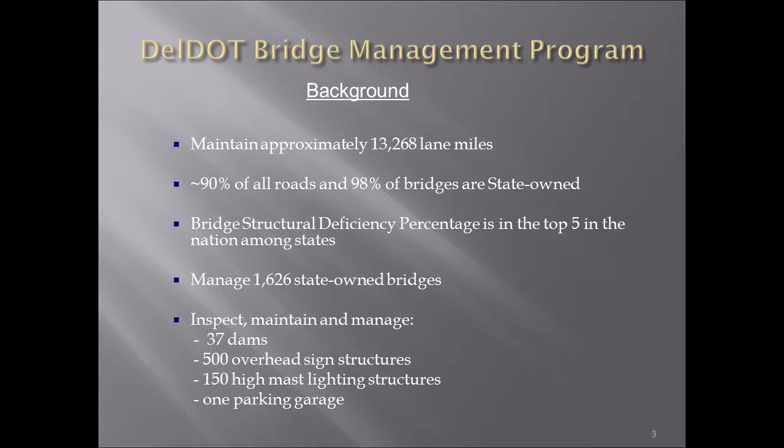As I said, I'm the bridge management engineer, so I oversee the bridge management section. Just a little bit about our core functions. A lot of the functions are no different than the other DOTs here. Obviously inspect the bridges, maintain load ratings, process hauling permits. Big thing is prioritizing bridge needs, maintain the bridge preservation deterioration models. The other thing we do is, we obviously inspect the overhead sign structures, dams. We manage those as well.

We also do the cantilever traffic signals. We inspect those for our traffic section because they don't really have inspection personnel, and they're kind of important structures that we've had problems with. So we actually inspect the cantilever traffic signals as well. We do that through a consultant. We don't do that in-house.

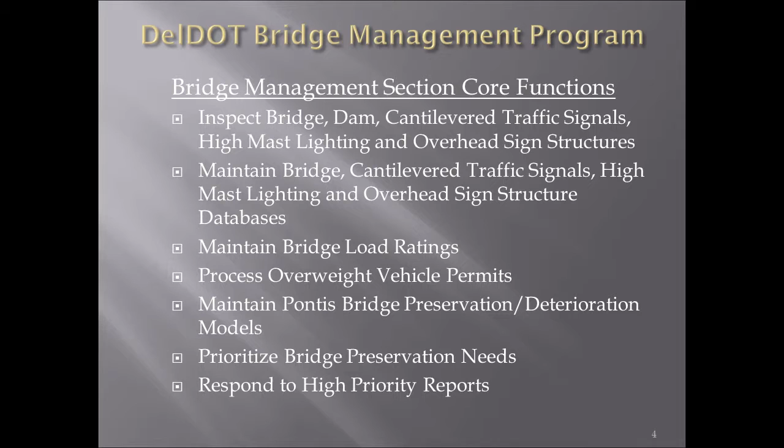And the last thing is we respond to high priority reports. That could be anything from a property owner complaint about drainage. It could be a bridge strike. In fact, last week we had 3 bridge strikes. And of course, one was Friday afternoon about 3 o'clock right before Labor Day weekend. So those are always fun.

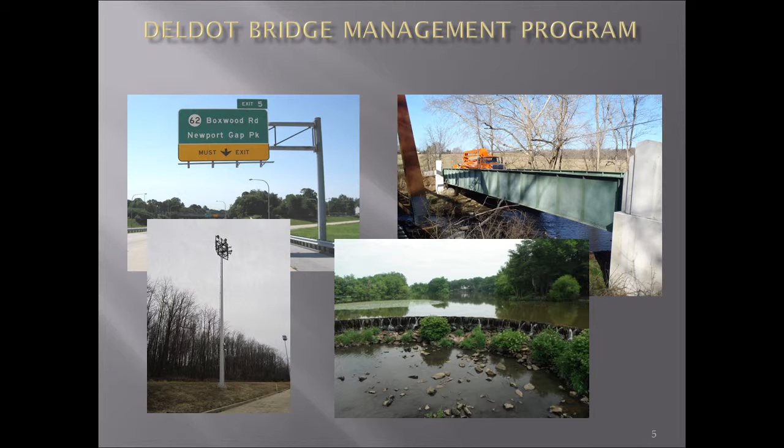Just a quick view of some of the structures here. You see a cantilevered sign structure upper left-hand corner, high mast light. Got a through girder bridge. It's a fracture critical bridge up in the upper right-hand corner. And then a picture of one of our dams. It's actually looking at the spillway taken from the dam.

Kind of jumping into the current state of our bridge inventory. As I said, we had a little over 1,600 bridges. You can see we have a lot of culverts, and so of the 1,600 bridges, about half of that are NBI length structures, about half of that are what we call state length bridges. So the majority of our state length bridges are culverts, so that's why that number is so high.

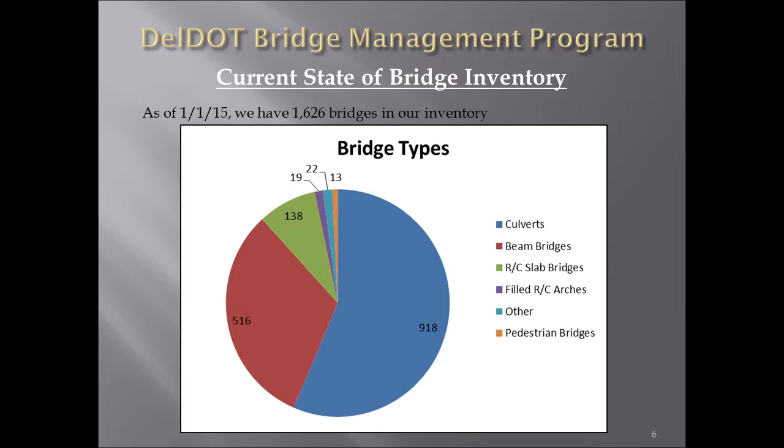See, we have beam bridges. The 22, that little light blue sliver, that's other. We do have 1 cable stay bridge. That's our Indian River Inlet Bridge. It was just completed 3 years ago. Includes our movable bridges, some other complex bridges. I think total we have like 27 fracture critical bridges in the state.

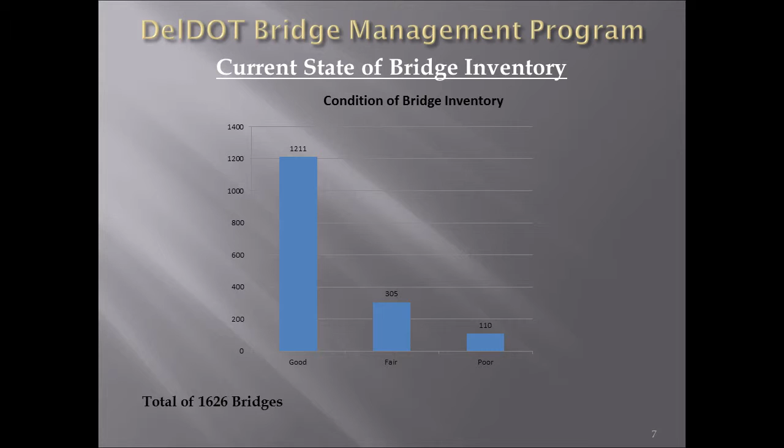So our current condition of our bridge inventory, we have 110 bridge structures that are in poor condition, meaning structurally deficient, that's NBI 4 or less. A little over 300 in fair condition, and the rest are good. Just to kind of summarize, a little less than 7% of our bridge inventory is structurally deficient. A little over 25% is fair and poor, or looking at it the other way, a little less than 75% is good. And I'll talk about performance measures a little bit later.

So some of the key issues affecting our bridge inventory. Going back to those 110 bridges that are structurally deficient, they typically fall into one of these 5 categories here, and it's probably very similar to any other DOT. You have problems with your RC decks, you have scour, painting, corrosion of your steel bridges, substructure deterioration, which for the most part is typically a result of our joints. We're getting water down to the bearing pedestal because of leaking joints, damaging bearing pedestals, loss of bearing, stuff like that.

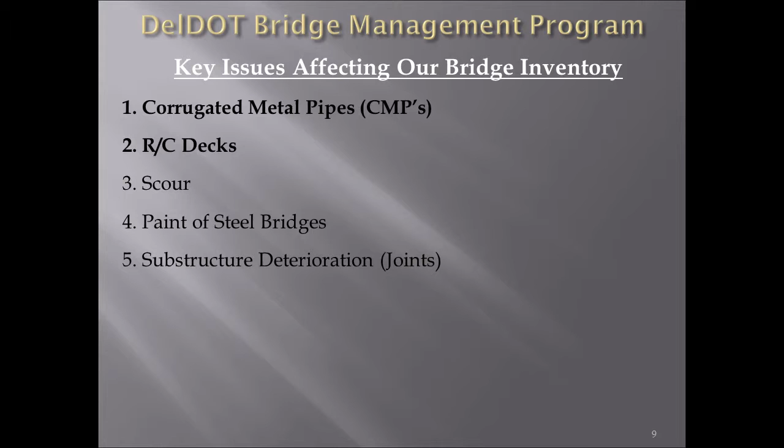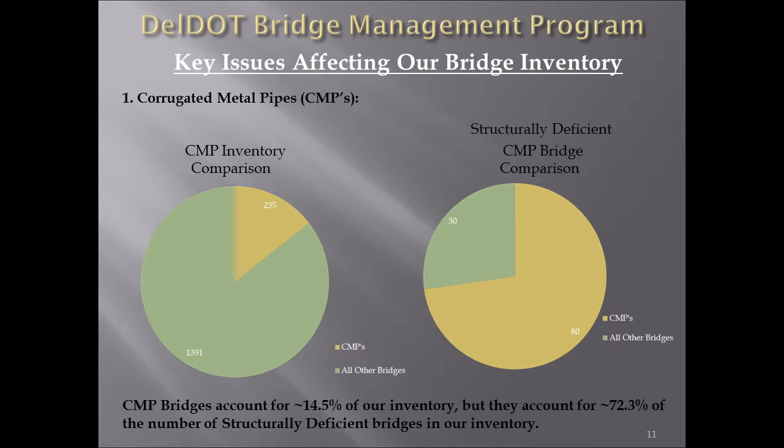So the first one here is corrugated metal pipe culvert bridges. We have a pretty big problem with those. The pie chart on the left is a comparison of our CMP bridge inventory compared to the rest of our inventory, and on the right, it's a comparison of the structurally deficient CMP bridges compared to the rest of our bridge inventory. To summarize, our CMP culverts make up less than 15% of our bridge inventory, but they account for over 70% of our structurally deficient bridges. We have 80 structurally deficient CMP bridges. We have a big issue with CMPs.

And a couple reasons why we have this issue. Starting in the late 70s into the 80s and even into the 90s, we had a lot of old little timber structures on a lot of our back roads. They were deteriorating. We had a real good salesperson come and sell us on steel metal pipe, and that's what we ran with back then. We replaced those with steel metal pipe. A lot of these pipes were dropped off the inventory once they were replaced, not really sure why. We realized that back in 2005 and started picking them back up in our inventory. And of course, by this time, they're in pretty bad shape.

On top of that, every now and then we find what we call found bridges, meaning we didn't know they were out there. There's no documentation anywhere. The district wasn't really aware of them. We found 24 last year, and you can see a high percentage of them were SD when we found them. Found some more this year. We actually have what we call a found bridge crusade. Most of the time they're CMPs, but sometimes we find some reinforced concrete pipes, or we found a couple frame culverts. So that's not helping our situation.

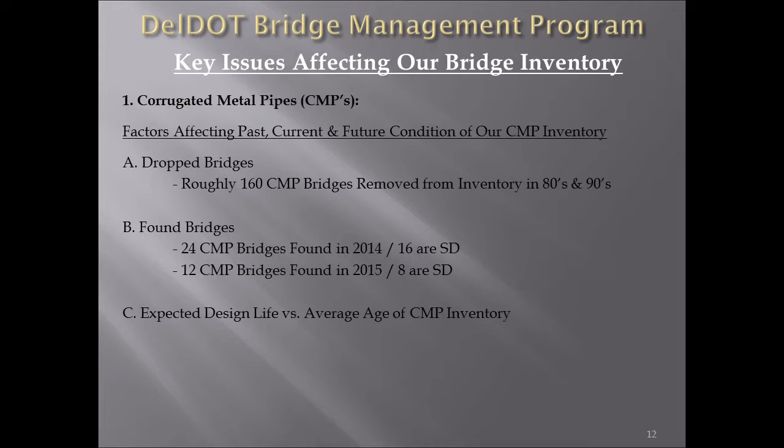They're small structures, but unfortunately, if they get kicked to bridge design, they have to go through the full bridge design process. It's a lot of resources for such a small structure, and we're talking 15 bridges per year that become SD. It's a lot of bridges for us to work on. I think, unfortunately, some of our fair bridges have been taking a little bit of a backseat, and I'll discuss that in a little while.

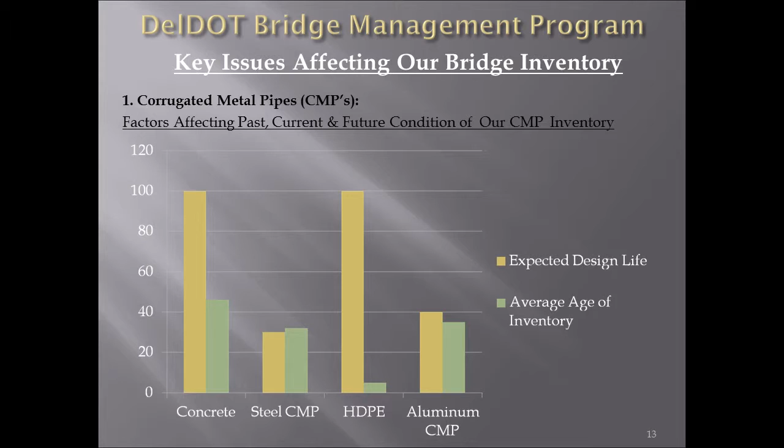Jump into our reinforced concrete deck issues. Probably preaching to the choir here, but at least by Delaware standards, the past 4 or 5 years we've had some really harsh winters. And someone made a good point earlier that in the Northeast, once it gets cold here, it typically stays cold. Whereas in Delaware, we can go a week or two where it's really cold and we get a break. So we have a lot of different freeze-thaw cycles.

And then with the snowplow damage and de-icing agents, the past 3 or 4 years, once winter ends, a lot of our bridge decks, there's just potholes and spalls everywhere, a lot of deterioration. Trying to keep up with that and keep that patched, it's been a huge effort.

Some other things that we noticed: inspection limitations. When I first started here in 2000, I actually started out doing bridge inspection. The traffic is nothing like it is today. It's just amazing. You can't necessarily get to all the areas you need to inspect unless you close lanes down to do a deck sounding. You don't really know what the deck is on the travel lanes. You can sound the shoulder and do a little bit along the joint, along the shoulder, but you really can't get into the lanes.

Whereas when I first started, you could get a good break in traffic, run out there, do some random sampling or random sounding. You can't even really do that nowadays. Our traffic section, for our interstate bridges, and they're starting to extend that to some of our expressways now, requires nighttime lane closures, so it makes it harder to inspect that bridge and really do a thorough job of looking at that bridge and identifying deterioration.

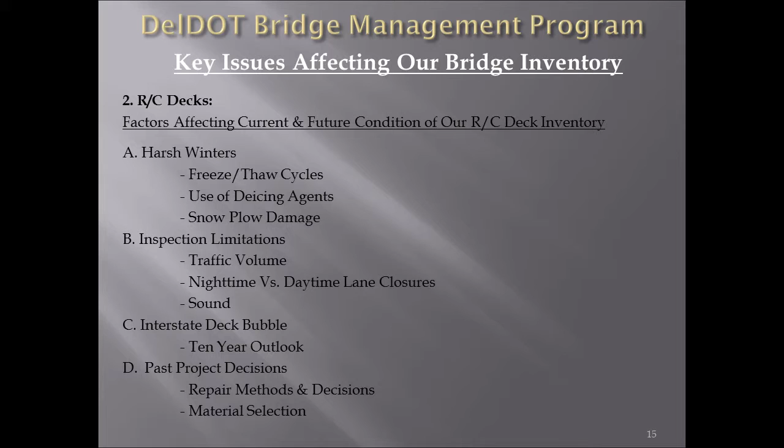So how does DelDOT manage our bridge assets? In Delaware, we use what is called a deficiency formula. It basically starts out with the bridge inspection. Our bridge inspectors go out, inspect the bridge, and break the bridge down into elements. We've been doing element level inspections since 1997, I believe, so we've been doing them for a while. We have used Pontis since 1996, 1997. So they inspect each element of the bridge, and you assign different quantities to each condition state for that element.

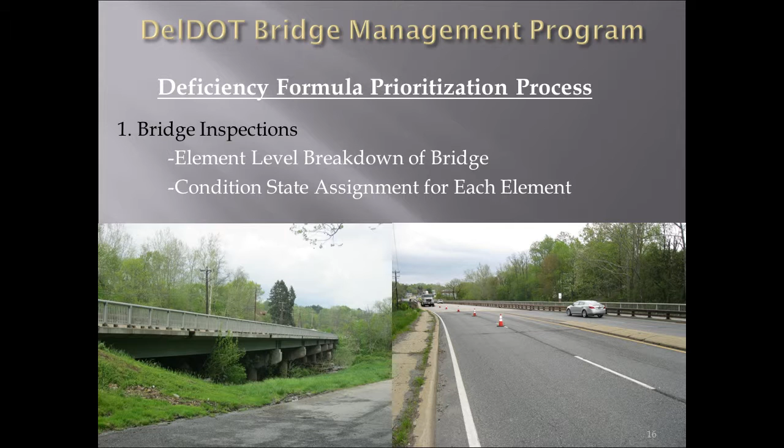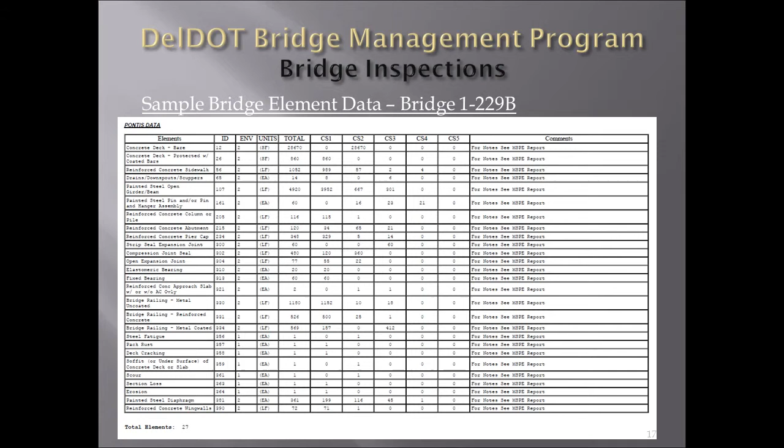This is actually for this bridge here you see in the picture. It's a 9 or 10 span bridge, carries 4 lanes of traffic. The data is not real important here, but you get a sense of the number of elements we have for that bridge, and then there are different condition states and different quantities in those condition states. So within Pontis, and I guess eventually AASHTO BrM, we have preservation and deterioration models that we created, and we have done that for each element.

Along with that, we have different possible work actions associated with each condition state for each element. So once the inspections are done and we go through this process, run the database, it goes to a bridge, looks at the elements, for each element, for each condition state. It runs the preservation deterioration models, determines the lowest long-term cost, basically it determines its recommended work action based on the long-term cost, and does that for each condition state for each element for each bridge. And then kind of going from there,

it calculates that total for all the elements for each bridge, and if we get at least $1,500 in recommended work actions from that process, it spits it out to what we call our deficiency list. That threshold, we're actually looking to up it. It was, I think, about 10 years ago when that was set, and the idea was 1 day's worth of work for a 3-man crew.

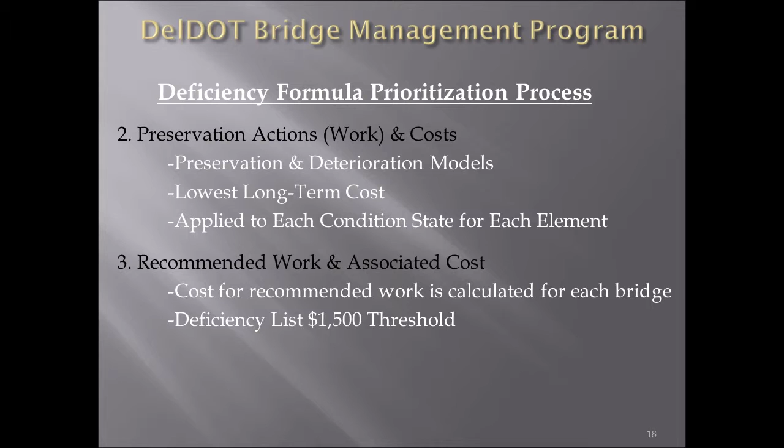So that deficiency list then actually has what we call the deficiency formula applied to it. So for each bridge on that deficiency list, the deficiency formula is calculated. The deficiency formula is essentially a set of factors that have different weights, and depending on certain factors for each bridge, it gets different weights for each of those factors, and you get assigned deficiency points. So for each bridge, you'll get deficiency points, and the list will be ranked by deficiency points. So the higher number of deficiency points, the higher up that bridge will be on the prioritization list to be worked on.

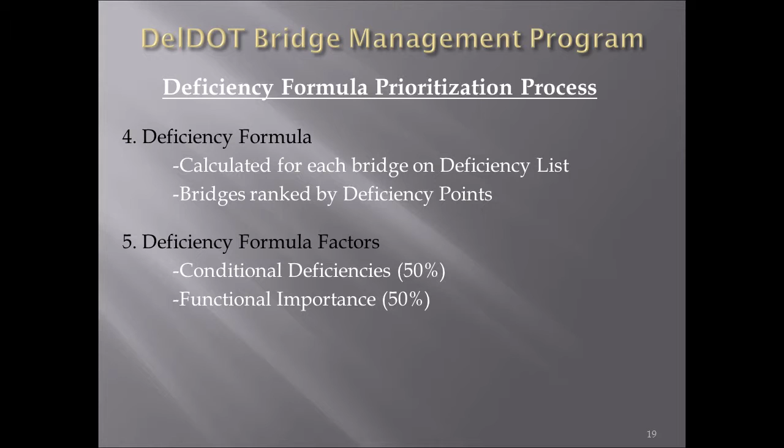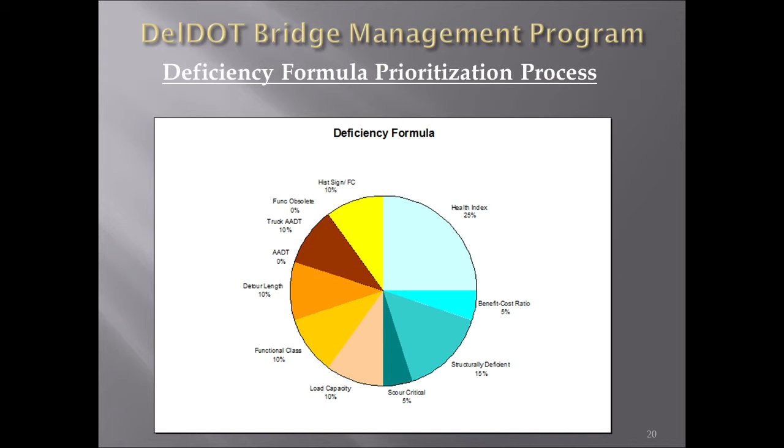The deficiency formula factors are broken down into 2 general groups, conditional factors and then functional importance. I don't know if you guys can see this, but this just lists the different factors. So I'll just list them real quick. Health index, benefit to cost ratio, whether or not the bridge is structurally deficient, whether or not the bridge is scour critical, load capacity, functional class of the roadway, detour length, whether or not the bridge is historical or whether or not it's fracture critical, and then the truck ADT, or truck percentage, I should say. And then the percentages of the most points you can get for that category.

And then we'll usually meet mid-April. We'll meet with our bridge design section, and we actually just sit down and go through the deficiency list. We start with the first bridge and just work our way down. If the bridge is already in the system, meaning it's already got a project initiated, we'll just do an update. Is it still on schedule for whatever time we said? Yes, no, what are the reasons? Is there some hold up, whether it be utilities, right of way, whatnot?

And if we come to a bridge that is new on the list, we actually bring it up right then and there. We'll bring up pictures and discuss why it's on the list, what type of work it needs, and basically identify the mechanism for addressing the work needs, whether it needs to be a bridge design project, whether it's something our in-house maintenance crews can do, or whether it's going to be one of the different projects that bridge management will put out, like a paint project or structure maintenance contract, and I'll get into some of that a little bit. But we do that for the whole list. We usually try to go far enough down the list to where we have enough work for the next couple years. Usually that's down to maybe 200 on the list.

So addressing bridge needs. We have really 3 main categories. And in-house maintenance, I'm going to be honest with you, our in-house maintenance is nothing like what I hear from some of these other states. We do very limited bridge maintenance work, mainly because we have a small amount of resources and they wear multiple hats. They could possibly be mowing grass, setting up MOT somewhere. They also do bridge work. They could be working on a sign structure, guardrail. We don't have dedicated bridge crews.

The one thing they do well though, or at least our 2 southern districts, is they're good at replacing CMP culverts, which has really helped us. Probably on average, they're able to replace 12 CMP bridges that are structurally deficient. So that's really helped in trying to keep up with those and addressing those. They do get into some minor concrete repairs and a little bit of minor scour repairs and erosion.

We're actually looking, with one of our districts, to kind of resurrect their bridge crew that they used to have and try to get them doing some more maintenance stuff. We'll see how that goes.

And then we have a second one there, structure maintenance contracts. I really probably should have labeled that bridge maintenance contracts. So what bridge management does is we actually have a structured maintenance contract. It's an open-end structured maintenance contract for each of our 4 districts. It's for 3 years, and there's a set type of work, a preventive maintenance agreement that we had worked out with the feds, of work that they can do. Those are some of the major ones, but there's other stuff as well.

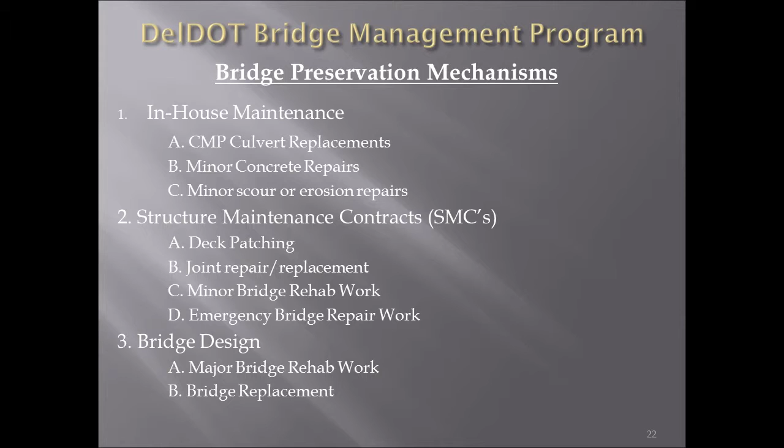So performance measures. To have an effective bridge asset management program, you need a way to measure how you're doing, how effective the program is. In Delaware, it's pretty simple. Anything less than 5% structurally deficient, that's our goal. And then, depending which way you want to look at it, less than 25% of the bridge inventory in fair or SD, or greater than 75% good. Those are our goals, those are our measures.

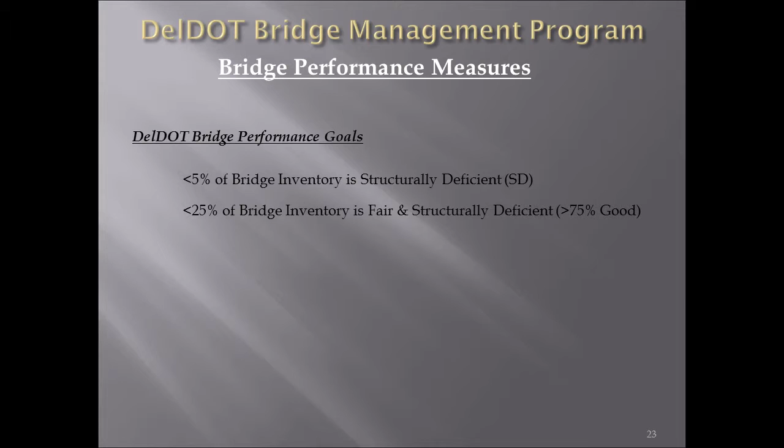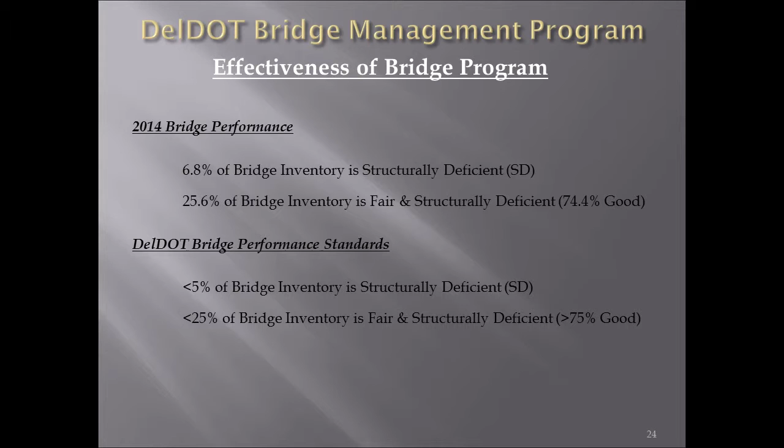So as I mentioned earlier, when I was talking about the condition state of our bridge inventory, we're not meeting those performance standards. We're not missing it by much, but definitely we have to do something better than what we're doing. So how can we improve the bridge program? Over the past year and a half, probably even 2 years, I've noticed that we're not really getting to our bridges that are in fair condition soon enough.

Part of that is just because we're so inundated with the structurally deficient CMP bridges and trying to get those replaced, and sometimes closing roads or posting roads. It's been hard to get to them, but we need a better way to address our fair condition, because we want to prevent the bridges from going from fair to structurally deficient condition. So some different things we're doing. We're actually in the process of making modifications to our deficiency formula. We'll incorporate that next year.

And basically, we're assigning points. If we have a fracture critical bridge, it can get 10 deficiency points. And what we're finding is that we've had a couple fracture critical bridges that were worked on 3 years ago. They're in pretty decent shape right now, but they're still kind of high on the deficiency list, because we have such a high number of points given to that bridge just because it's fracture critical. So what if we only did 5 points, and took that additional 5 points and gave it to bridges that are in fair condition?

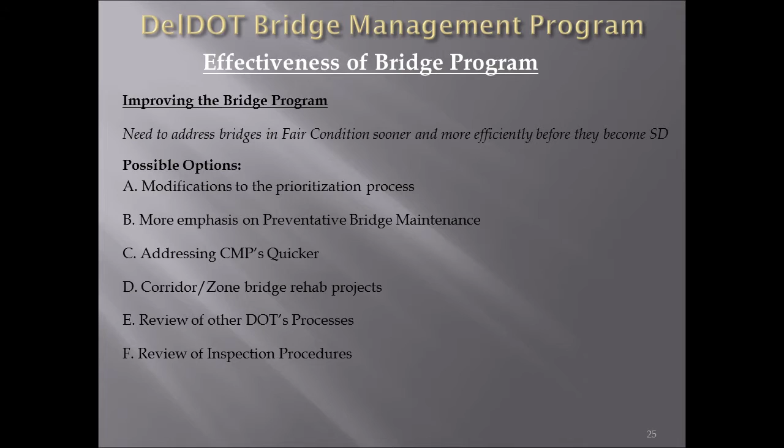So just kind of a conclusion here, some of the things that we've come to find out over the past 10 years of using this deficiency formula prioritization process: you need a systematic process. The results need to be reproducible. The process also has to allow for some flexibility. Not everything fits in a square box. Obviously funds are limited. If you have a successful bridge management process, it allows you to maximize those funds and makes it easier to justify those funds. One thing we found is it definitely helps out in less political intervention. When you have a systematic process, it's easier to say no to projects or requests that aren't really needed. It also prevents scrutiny of your bridge program because you have a well-defined process.

And obviously you need some performance measures to kind of grade your process and see how effective it is. And then last, probably most important, you need to periodically review that process, as we found and as we're starting to make changes now. What worked 10 years ago might not work now or might not work 10 years from now. So you constantly have to review it and evaluate it, see if any changes need to be tweaked or whatnot.